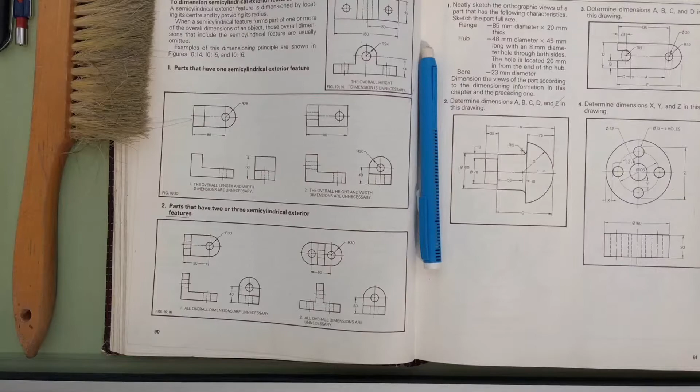Okay, so these objects that we're going to be dealing with next are just over the page here onto 92 and 93. Just a few more notes about how these things are going to be dimensioned on exterior features. Most of it we've covered already, but

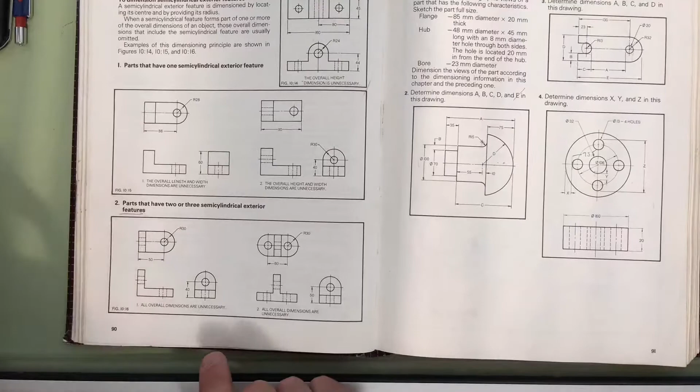just swatting away a wasp there.

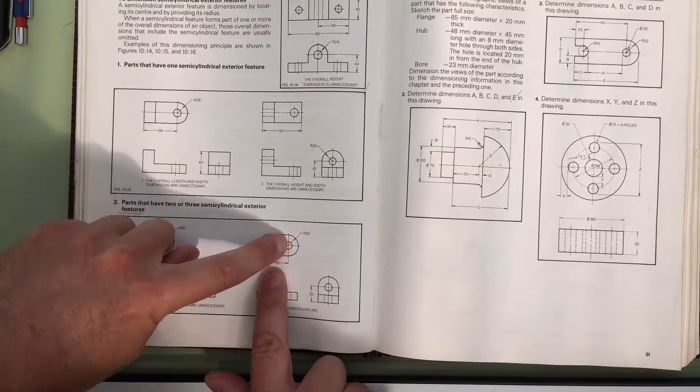Again, try and make sure your dimensions are to the outside of the object. Dimensions on the inside here, you can see they're between the center lines for the object. So we've got 60 to the center line of the hole, plus we've got another 30 to the radius to the outside of the object. So it'll be another 60. So this thing is 120 millimeters long. So there's no need to dimension an overall length for this thing. So you'll want to avoid that because that's typically not good practice.

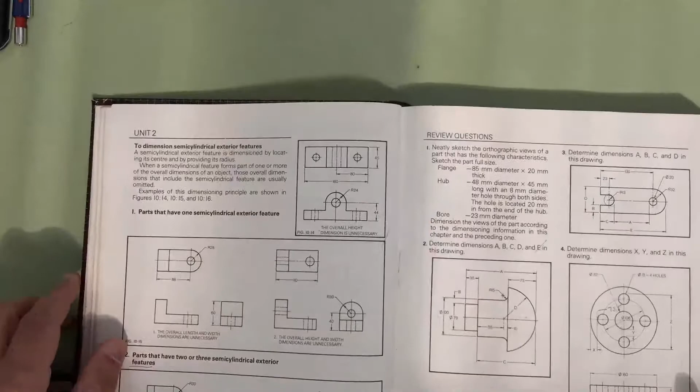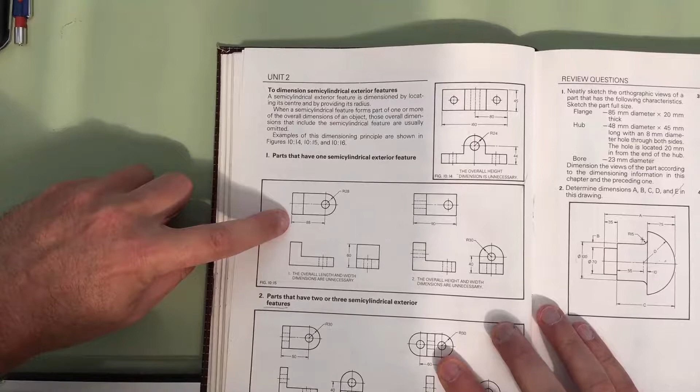So if we were looking at this object here, it's okay to run a dimension to the outside of that because it's got square ends. If one end was rounded, then this overall dimension would be from the square end to the center line of the circle, like you see here. So here you can see that this thing is dimensioned to the center line, and then the fabricator, when they're figuring out the total size of steel that they're needing to cut out to build this thing, they would add that little piece on the end.

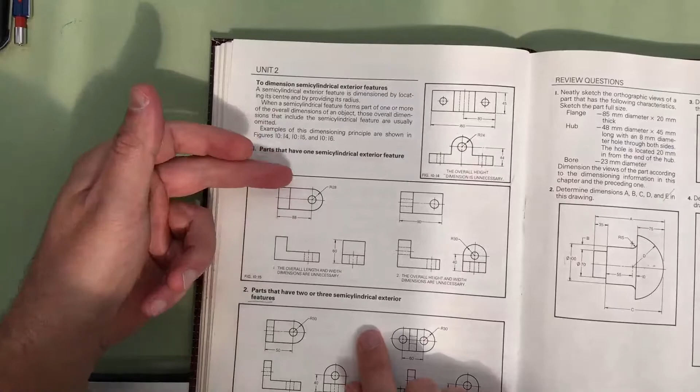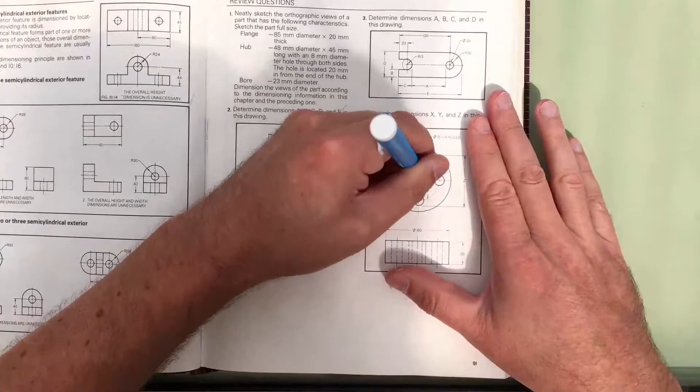Okay, so then just some more notes about putting in those bolt circles. I just need to erase some other people's pencil marks here. Oh boy, those aren't going to come off.

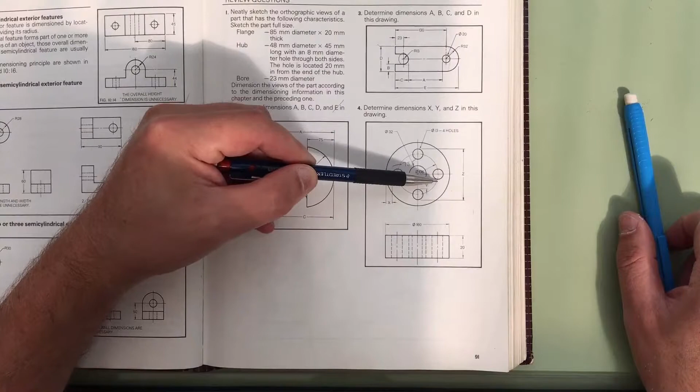Actually, that's pen. So again, bolt circles, just make sure that here where you've got 4 lines that are dashing, that they intersect nicely at the middle, and then you get that sort of little dashing in both directions here. So the bolt circle dashes as it passes through the hole, and it's a bit of an arc that's here, not a straight line. That's in the same radius as our bolt circle elsewhere. And then you have your one radial ray that emanates out from the center of the circle.

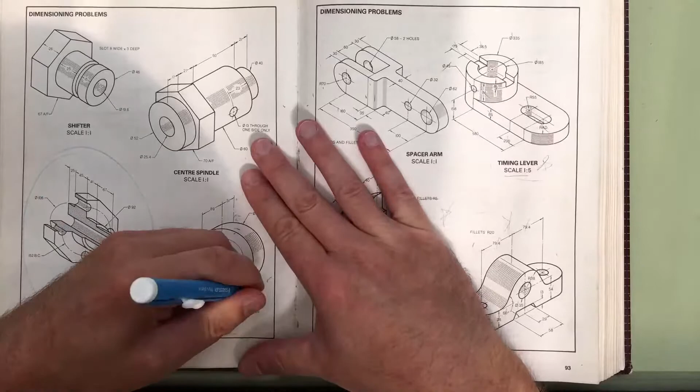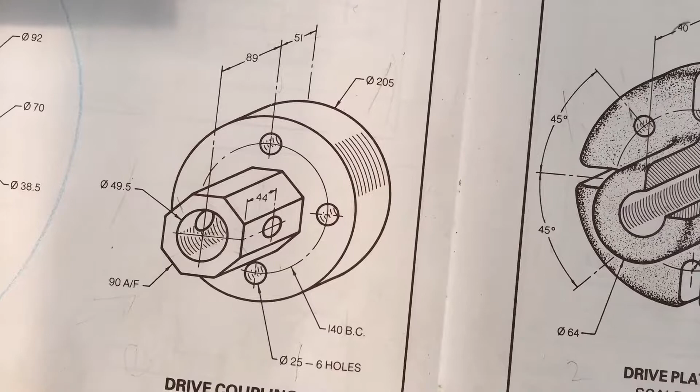Okay, so let's look at the 4 objects that are being required here. So we've got the drive coupling, this one here, and I'm just going to erase some of this extra stuff because I want you to be able to see it. So I'll just get this up here so that you can see it clearly. I think what I'll do is I'll also put the pictures of these 4 objects into the ADT1 channel as well, just some still pictures. So there's the drive coupling. That's one of the objects that we're going to be doing.

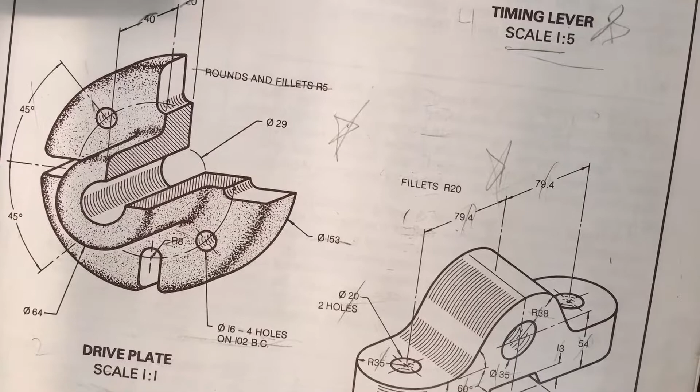Then the drive plate, which is this one right here. Now you can see that there is a portion of it that is cut away. So we're not going to be drawing that. Oh no, you know what? This is the one where, okay, this one has been shown cut away, but we're not going to be cutting away this bit in the center. So I will note that in the ADT1 channel as well.

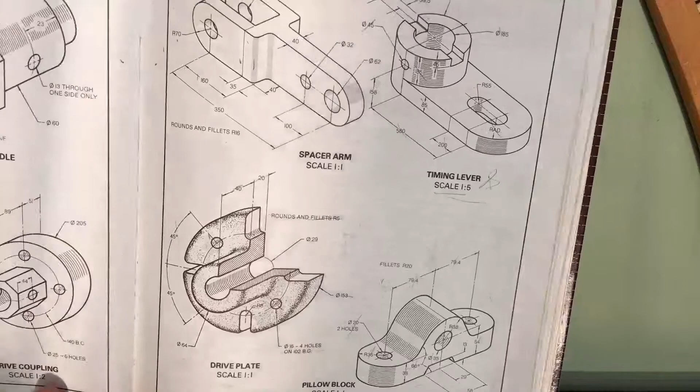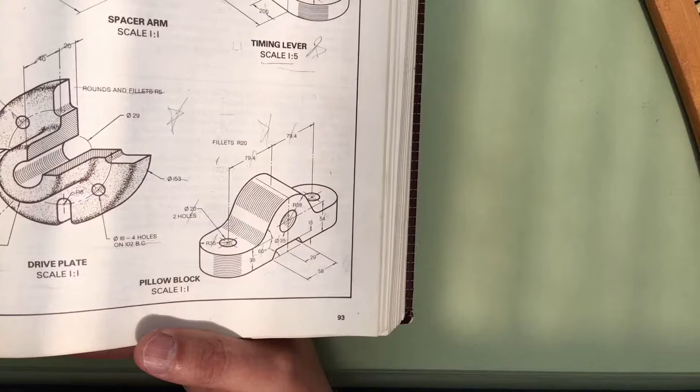So then the other object here, the timing lever, and also the pillow block. So these are going to be a little bit more tricky features to draft up. So what I'm going to do is, first of all, I'm going to start drafting up the pillow block, and then we'll talk about some of the strategies. And it's going to be very similar to that V block that we did earlier, where it made sense to draw the front view of it first, so then you could start drawing up some of the other stuff. So I'll just go grab a piece of paper here, and then we'll get started.

Okay, so like I said, I'm going to start with the pillow block because that's kind of the toughest one. So I'm just going to get myself some space here.

Seems like the air is maybe clearing up a little bit here. I'm getting my view from the back deck. So

So I am going to go through this pillow block one with pretty good speed. I would say just watch along in the stream. Ask any questions that you've got as we go here. I want to get you folks rolling as quickly as possible so that you only need to come back to this stream for reference, because it's kind of boring for you folks to just have to watch this stream and then try to get some drafting done as well.

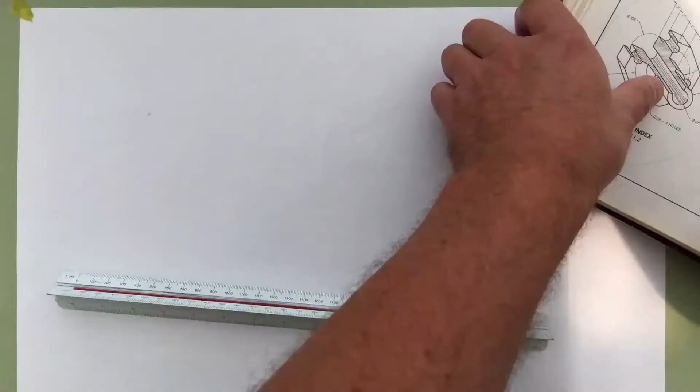Okay, so I've just got to go back and confirm the scale that I'm working at here with this one. Okay, so the pillow block says scale of 1 to 1. I'm just going to confirm that, 79.4. Let's see here. They're suggesting in the textbook that it should be drawn at 1 to 1, but this thing would be about 210 millimeters if it was drawn full size.

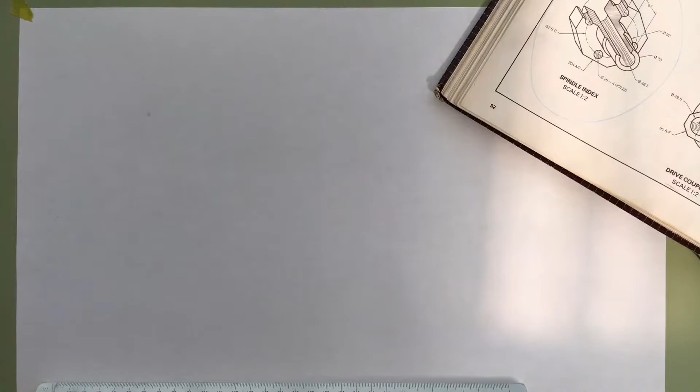That is pretty big. So keep in mind then that with the pillow block, we're going to be drawing this thing at 1 to 2, just to help fit it out on the sheet. Now, I'm not going to worry exactly here about the sheet layout. I just want to get some geometry down here so that we can talk about the strategies necessary to lay this thing out, because there are some tricky aspects of it because of the curves.

Okay, I'm just pulling up my calculator here so I can do the calculation on how long this thing is. So 2 times 79.4 plus 70. Okay, so 228.8, so I'll say 229. Just going to make a little note here. So 229. And then width-wise, it says 35 is the radius. So, of course, the diameter is 70. So it's going to be 229 by 70.

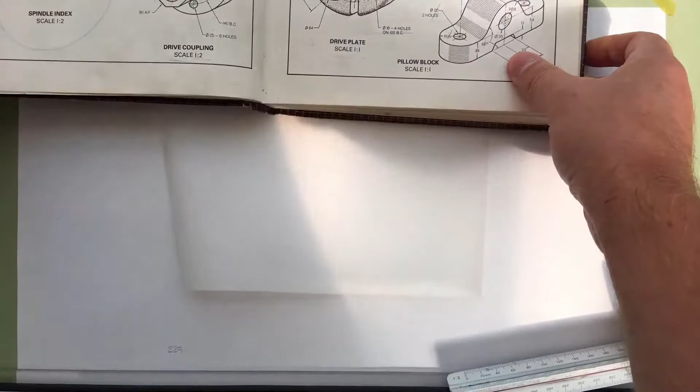So let me get a piece of trace paper here, and we'll just talk about the strategy for laying this thing out on the sheet. Okay, so based on the shape of this thing, I'll just get it into the camera view here. So there it is. So based on the shape of this thing, we've got to decide what our top, front, and side views are going to look like. In some respects, this is actually a deceptively simple looking object when you begin to lay it out. But getting into this curve, as we're going to see, is going to be tricky.

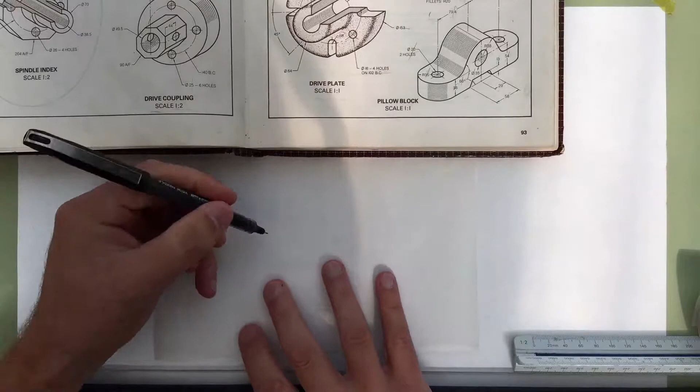So there's our top view of this thing. Here's our front view of this thing.

Now we're getting a bit of a breeze here. The perils of drawing outdoors.

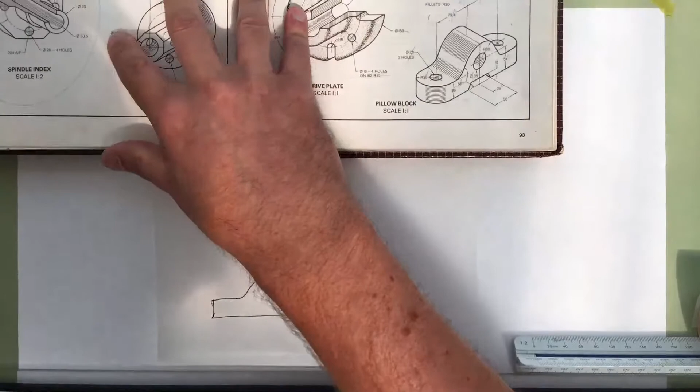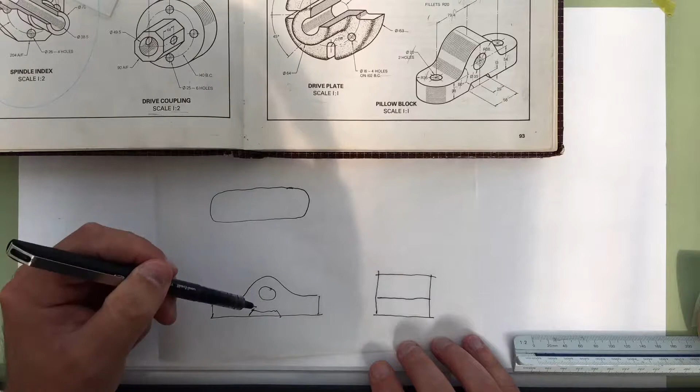And then here is our side view. Now we've got a hole in this thing. And so we're going to be able to transfer some of this information up, and there's going to be hidden lines that are going to be coming into play here. And so it makes sense to draw the front view of this thing first, because that's going to help us draw the other views. So get that front view drawn first.

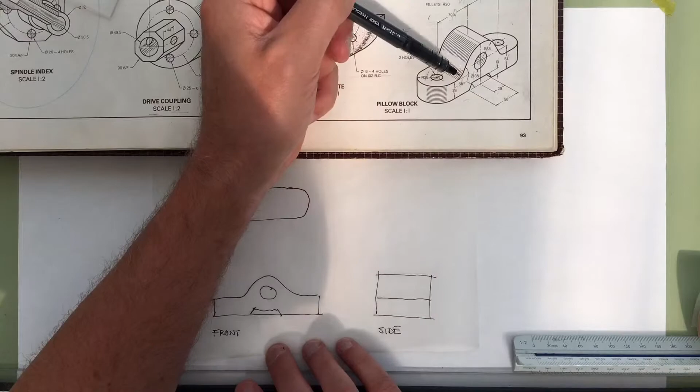Now I'm going to look at this situation here because there's something tricky about this, and you can see here that you've got these 60-degree angles here and here. So there's a portion of this that goes up at 60 degrees, and then we've got some fillets here, and then we've got a radius over the top. So I want to lay this thing out. So first of all, front, we're going to be doing that number one, and then we're going to start working on developing the other views.

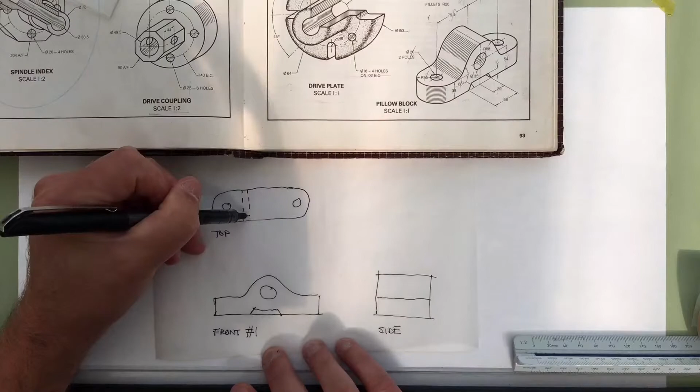A few things to keep in mind. These are all curves when we look at the front of this thing. So when we look at the top view, we are not going to see any of those curves translated up. This is basically completely smooth. So when you're looking at this from the top view, you wouldn't even know that this part here pops up. But what are you going to see? Well, we've got these four corners from this angled slot on the bottom. So that means that we are going to see four hidden lines from that. And you'll need to draw that in.

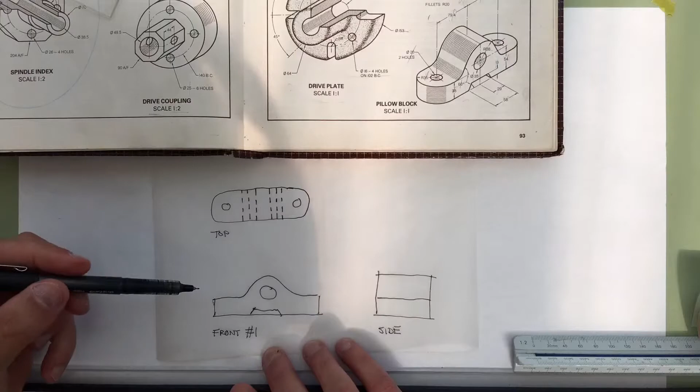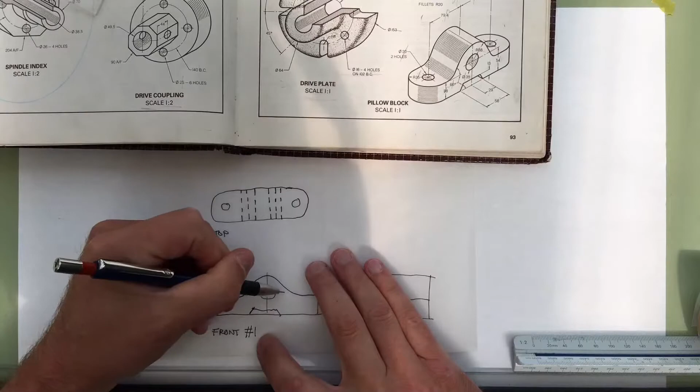Then we're going to have the hidden lines on each radius of the circle. So circles, when we're cutting through them, we see the hidden lines for that. Now also we're going to need the center line for all of our circles. So we will have a center line here in the front view, like so. And that center line, we will extend that upwards here as well.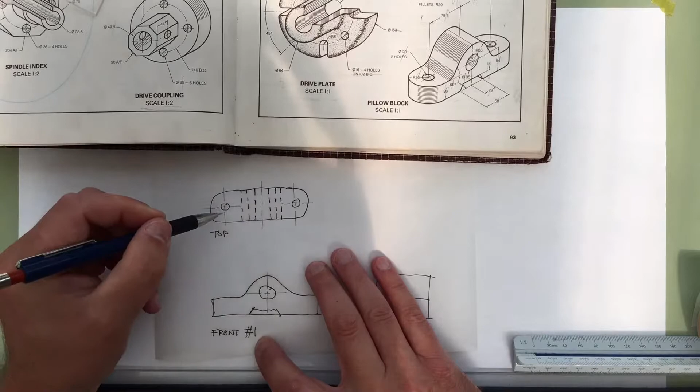Now, these center lines for the holes on the sides need not extend out beyond the object. So here you can see they're just quite small inside the drawing here, and that would be considered acceptable. However, the center line for this hole does need to extend out beyond the object because it goes right through.

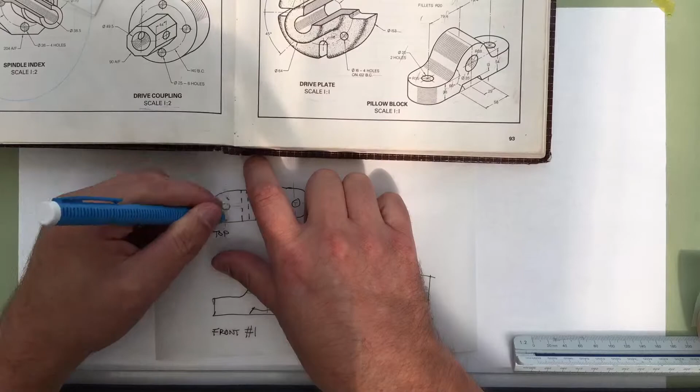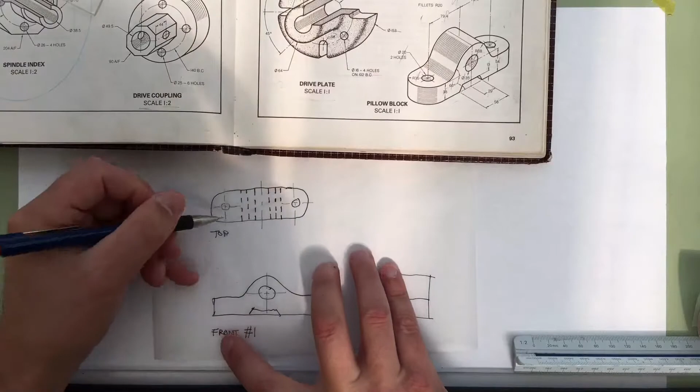So the center lines for the holes in the side can also extend out beyond the object if you wish, or if you prefer, you can just have a smaller little center line symbol that just indicates where that hole is. Now, down below here, we are going to need those dashed lines for the holes. And we're going to need the center lines for them as well. And they need to extend out above and below the object. So these are the kinds of graphics that we are going to be expecting to be seeing.

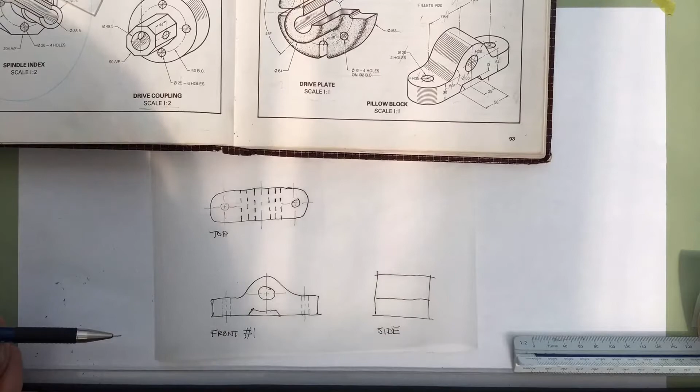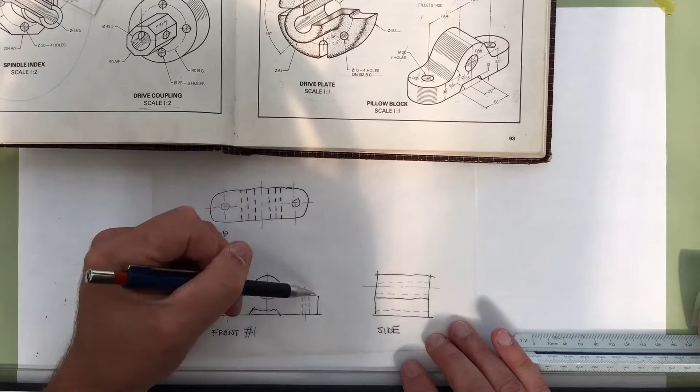Then when we're looking at the side view, we need to transfer our hidden line over here because of this slot. Then our center line over for the horizontal hole. Then our hidden lines for the hole. And then we've got our vertical lines here as well for the vertical holes that are in the bottom part of the plate. So these need to be shown in here as well as the center line for that hole.

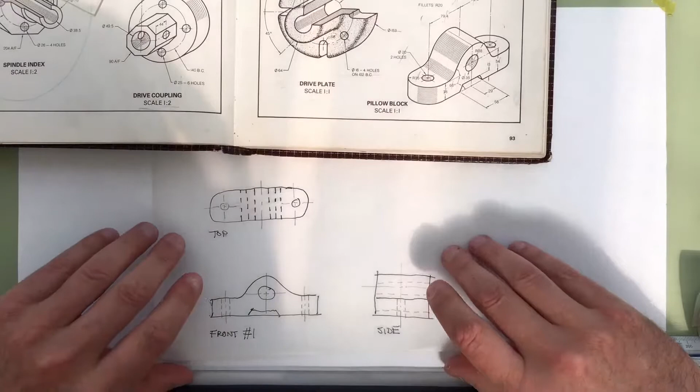So in a nutshell, that's kind of graphically what you should be expecting to see for this object. So that kind of gives a little bit of a spoiler on what the finished product should look like for this view. So now let's draw this front view so we can try and get it sorted out for you guys.

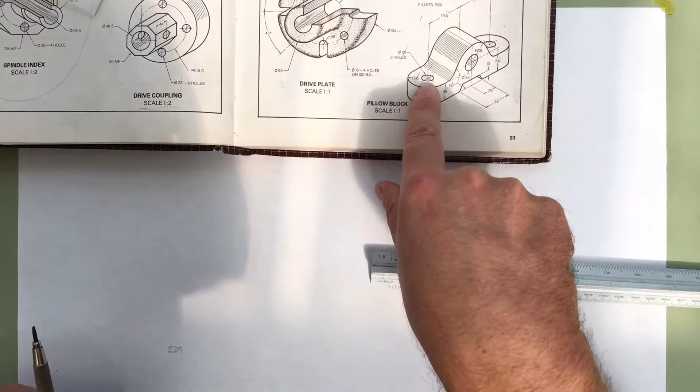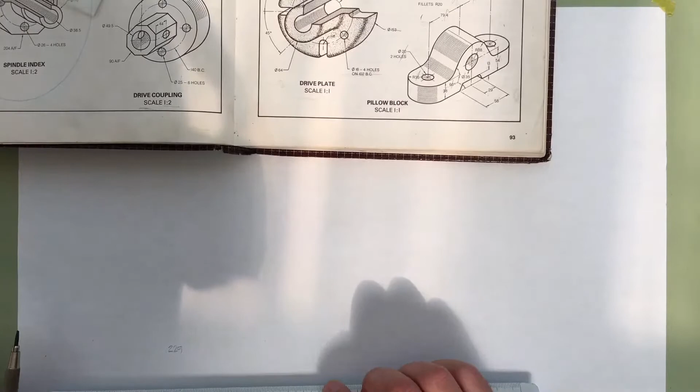Okay, so I've got to do 229 here. So I've done the math, 79.4 times 2 plus 70, so 35 times 2, so 70 plus this business gets me about 229. So I'm going to grab 1 to 2 here, and I'm just going to lay this out here quickly. Okay, so there's the beginning, and there is about 229. Okay, so I'm gonna lay that out. So there's my baseline.

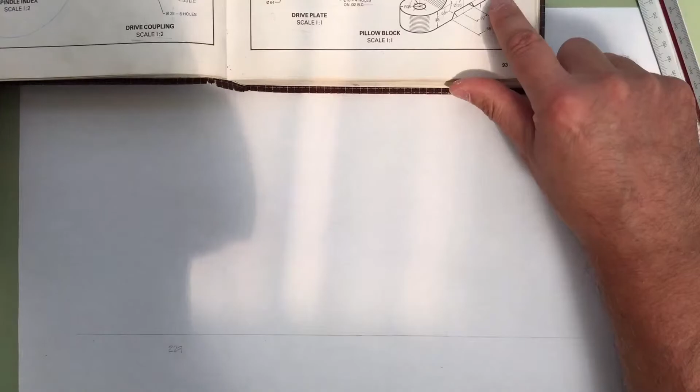And now, how do I figure out what the height of this thing is? Well, we've got a dimension right here, 54, plus we've got 38. So just by adding 54 and 38 together, that gives me 92. All right, so let's get it going here. 1 to 2. So there's 80, 90, 92, 94, 96, 98. So there's 92 right there.

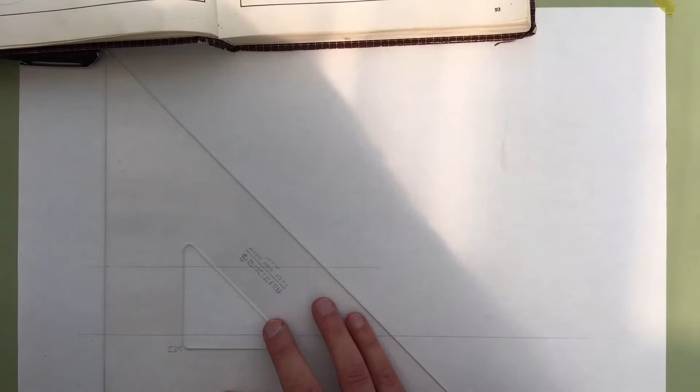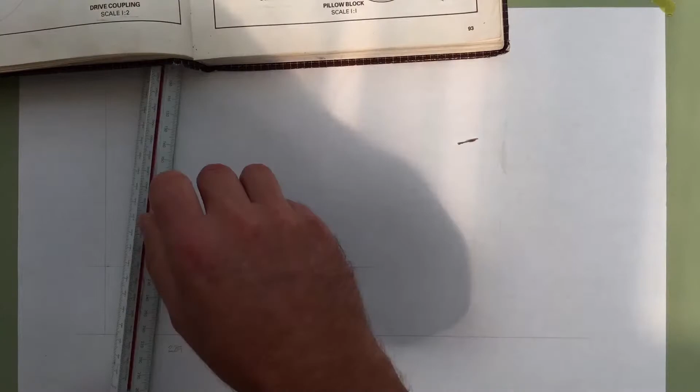Okay, so now I'll put my vertical in here for the end of this thing, and I'm going to project that line up, and so this is going to be my edge line for everything that I'm drafting up now. Okay, so next part here, need to draw the 38 thickness for the bottom plate. When you don't have enough room on your page. Okay, so there's 0, there's 40, there's 38 right there. Draw that across. Get the other end of the 229 here, which I forgot to draw up. Okay, so we've got this thing blocked out.

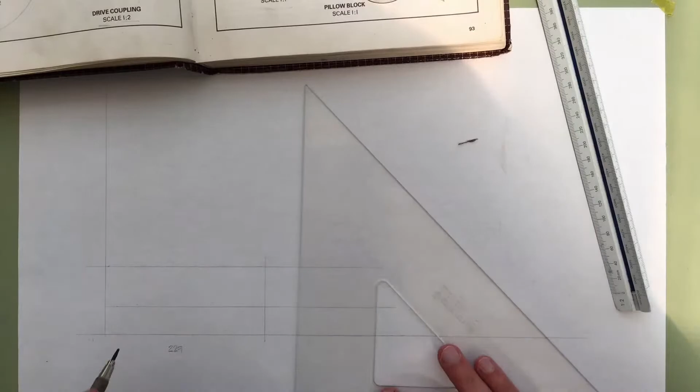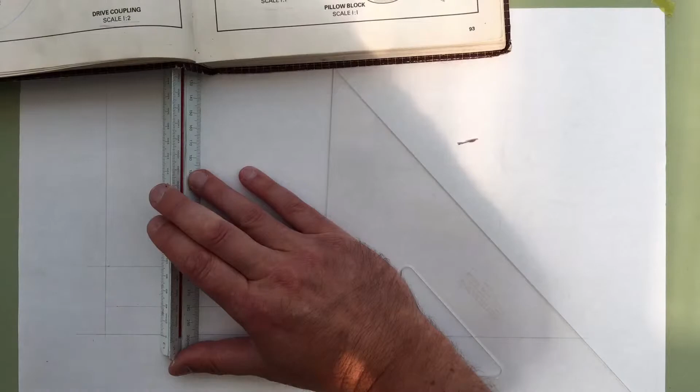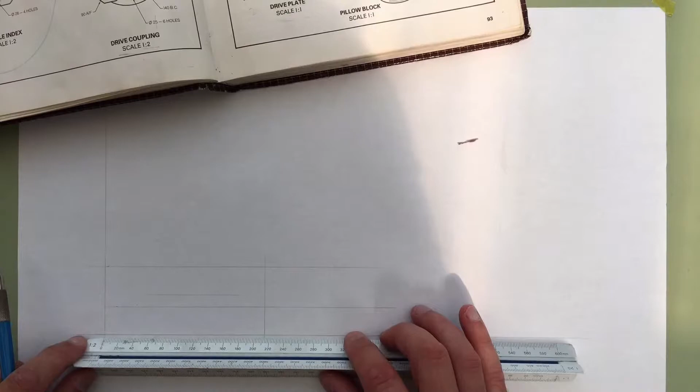Now what we need to do is, let's get the center line located for our hole. So it's 54 up. So there's 50, there's 52, there's 54 right there. 40, 50, 52, 54. And now half of 229, so I'm at 230. So 115 and a half. Whoa, what am I doing here? I just drew my line there in the wrong place. These are just construction lines, so it doesn't matter too much. I'm going to come back and put the heavy lines on later.

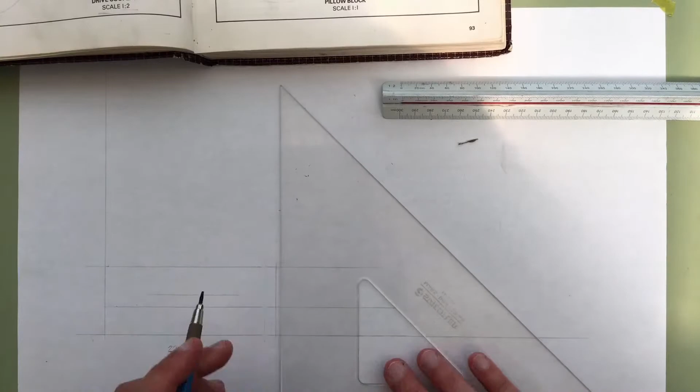All right, so 230, so I need 115 to find my center line from the one end. So there's 115 and a half. So there's 110, 115. So there's 116. So 115 and a half.

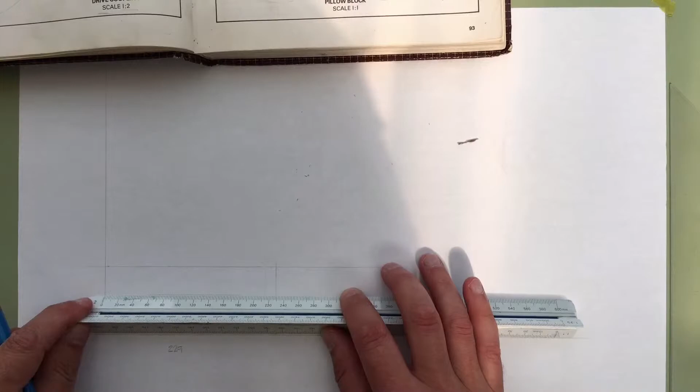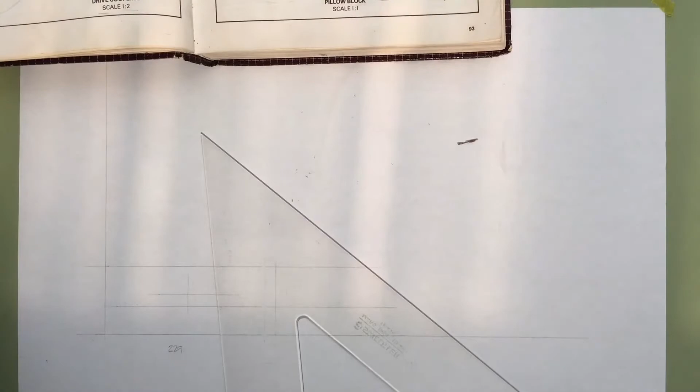So that's my center line of my circle right there. So now we have R38 for the curve from this point. So I will grab my compass here. And now I don't actually have to measure. This should be 38 from here to the top. So I can just do a little confirmation on this and make sure that it is in fact 38, and

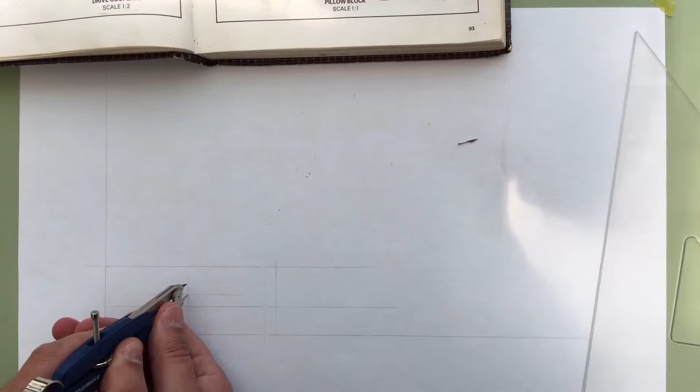it is bang on. So I can take my compass and very carefully make sure I get that point exactly. Then roll my compass out until I get to the top of my box here, and I'll just faintly draw in an arc. That's just so I've got a bit of a starting point. Now,

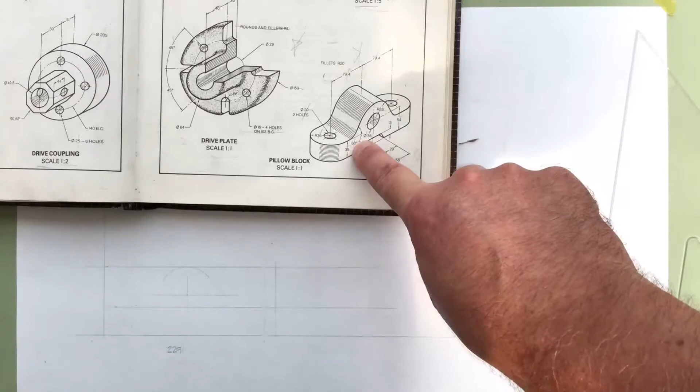this thing says that we've got a 60-degree angle for this piece at the bottom, but the leader there, you can see it points upwards. So it indicates that there's a 60 here as well. Now, what we're going to do is we're finding the tangent. So you can use your 30-degree triangle. And we're going to look for where, and I need to draw a little bit more curve here.

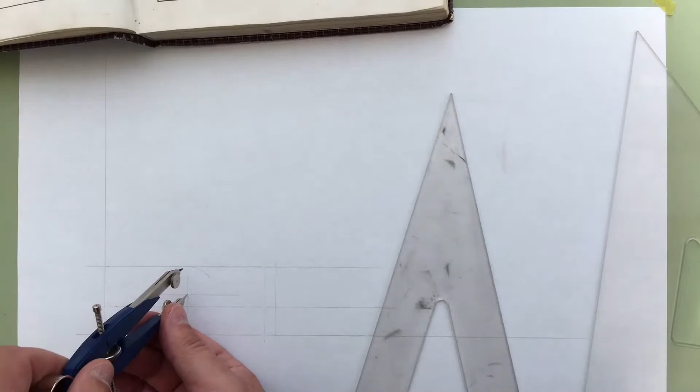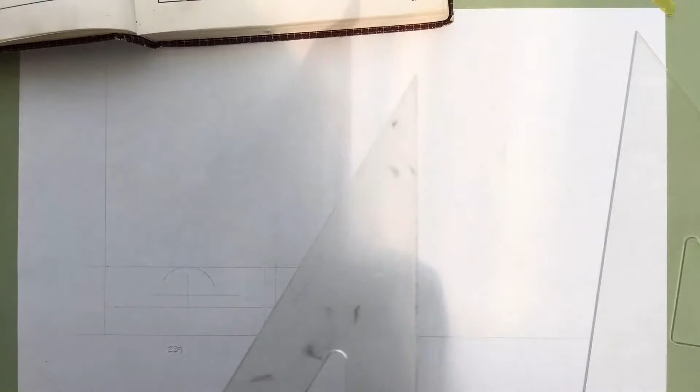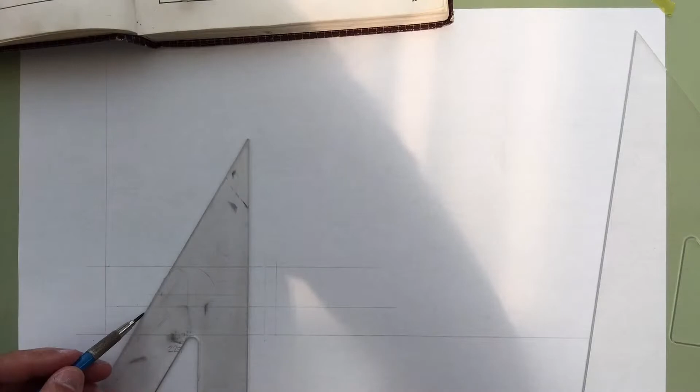So this is just a construction line. And I'm looking at my triangle here to see where I am coming to the tangent of that curve. So this is a bit of a tricky business. And once I can see where the tangent would be, just draw a little construction line here, flip the triangle over and do it on the other side.

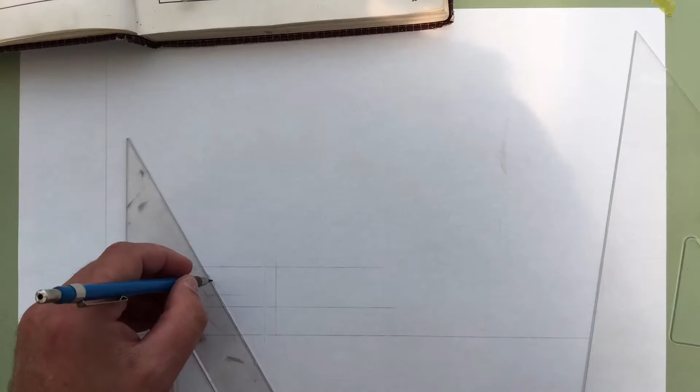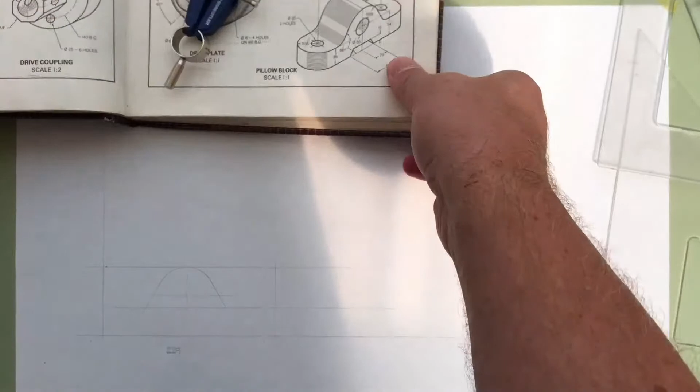There we go. Now, this line isn't going to be very long. This little straight section here is just going to come down, and then it's going to hit this fillet. Now, what is our fillet? Well, you can see here, the fillets are a radius of 20. So that means, I'm going to go back and grab my drafting ruler here. So there's 20 right there.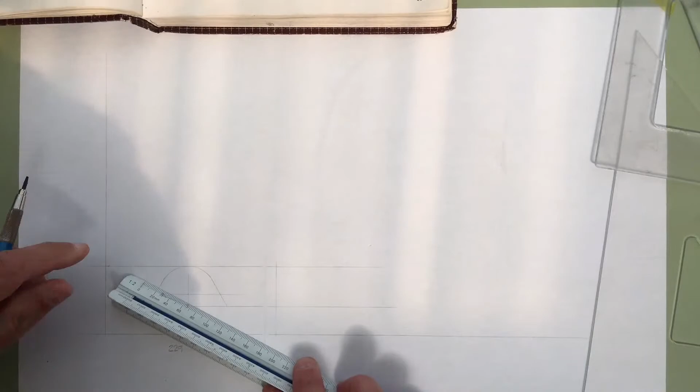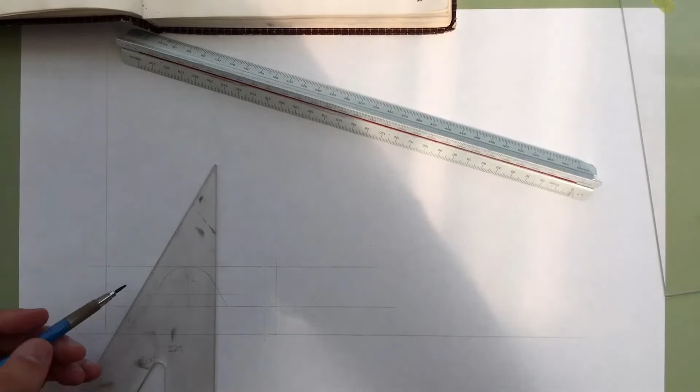And just like we've done earlier, we've got to draw those construction lines to bring this together. Okay, so there's that one construction line. And then here comes the next one. Okay, so where those two intersect, now we're going to draw our 20 millimeter radius with the compass. Now it's going to be really important that you get this intersection bang on. There we go. Yeah.

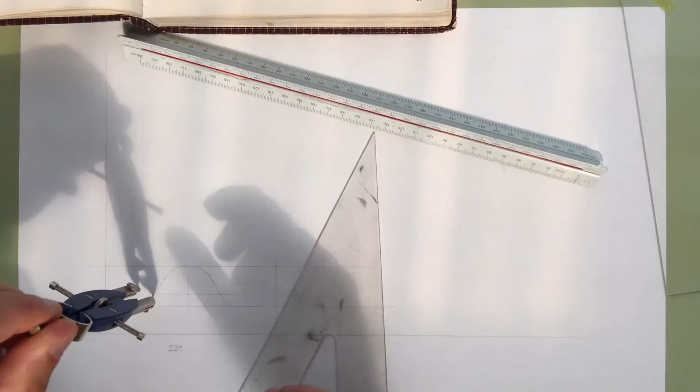It's in the text. It says fillets are 20 just above it there, if you have the textbook. It says it, yeah. No, it's right there. Yeah, all good.

I think I got my curve here a little bit off, so I'm just going to redraw it. And also, you want to make sure that the lead is at exactly the same height as the steel point, and I don't quite have that here. So that'll help. Now, if things start going south on you here when you're drawing up the curve, just feel free to erase it because I'm not happy with what I'm seeing here.

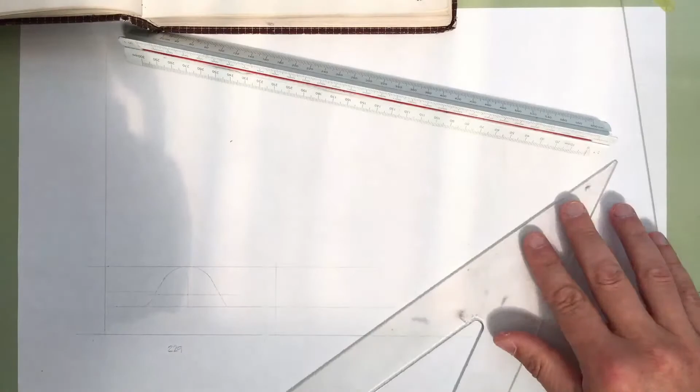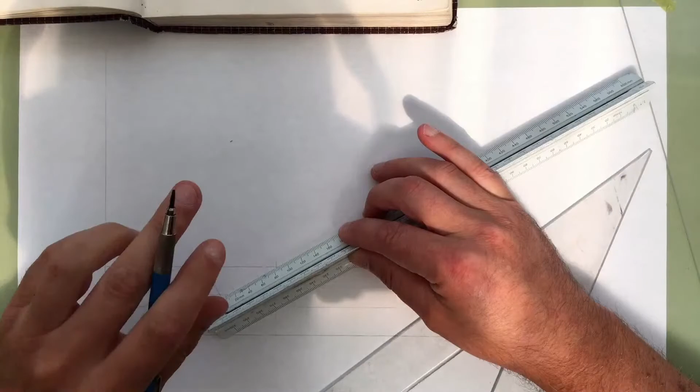Construction lines, so keep them nice and faint. And then once you're happy with how everything's coming together, you can come in with the big guns later and lay down the big curves. So same thing on the other side here. I need to do a 20 millimeter offset. See, you can tell I dropped my pencil. It's actually busted on the end, so I'm just being really careful so I can get the point of the thing.

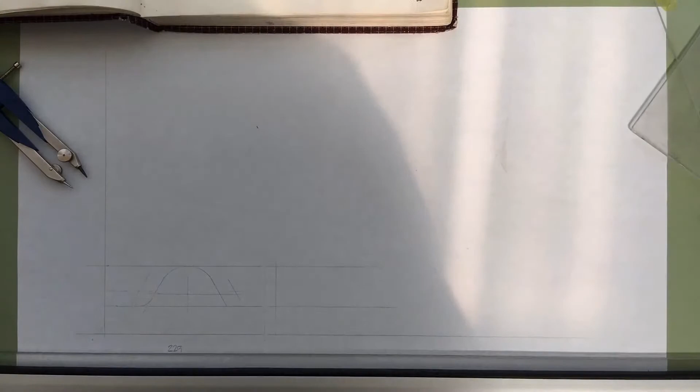There we go. And now we do the radius on the other side. Oh, that's not the right spot. There we go. Ugh. There we go. There. So you can see it's actually, this is looking pretty good. Let me see here.

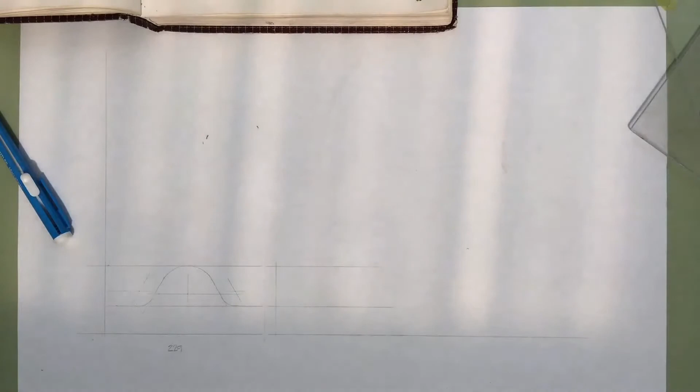Now, it's time to lower the camera down so you guys can see. Oh, come on. The moisture out in this thing overnight makes it more difficult. Okay, let's see if the phone's gonna autofocus here. Put a pencil in here, see if it's got something to look at so it sharpens things up. There we go.

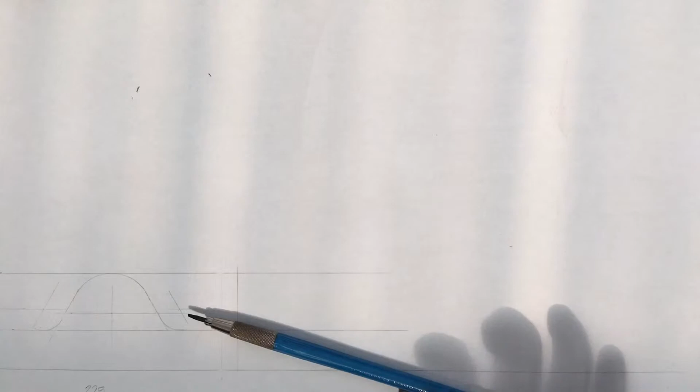So hopefully that shows you guys kind of the shape that we're going to be looking at here for developing that pillow block.